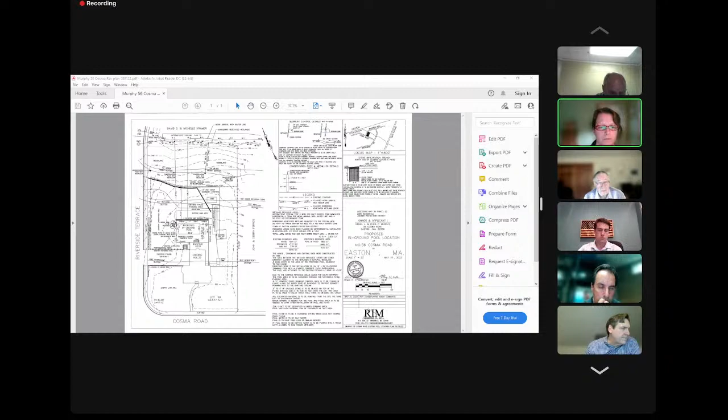Can you point that out on the plan for people? If you can, do you see the cursor? The western edge of the patio, right there, is where the existing lawn meets the existing mulched landscape area.

We went over it with the client last week. We ended up moving the pool further to the east to make it less out of the ground than it would have been if we had left it where it was before, and also to preserve the existing landscape area. Okay, thank you.

I think the other thing to note, from my standpoint, is that the applicant is proposing a filter cartridge system. Is that correct? Yes. So that's the one that's least impactful on the environment because there's no backwashing or anything, it's just changing of the filter. I just want to note that for the record.

So I don't have any further questions. Anybody on the commission have questions before I go to public comment? No, not for me. Okay, so no comments from the commission.

Any public comment? 56 Cosma Road. Just raise your hand or put something in the chat asking to be recognized. Okay, seeing none, Craig, I assume we want to close.

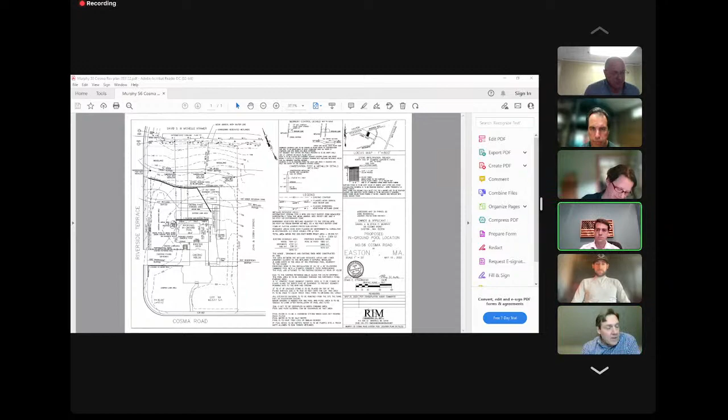Make a motion to issue a notice of permit for work and order of conditions for 56 Cosma Road. Carol, second. Just the permit for work. Let me remake the motion here. So, make a motion to issue a permit for work for 56 Cosma Road. Carol, second. Caulfield's, Carol second. Roll call vote: Caulfield's aye. Benson, aye. Carol, aye. Crossman, aye. Spady, aye.

Fair enough, Greg. All right, thank you very much. Thank you. See you in two weeks.

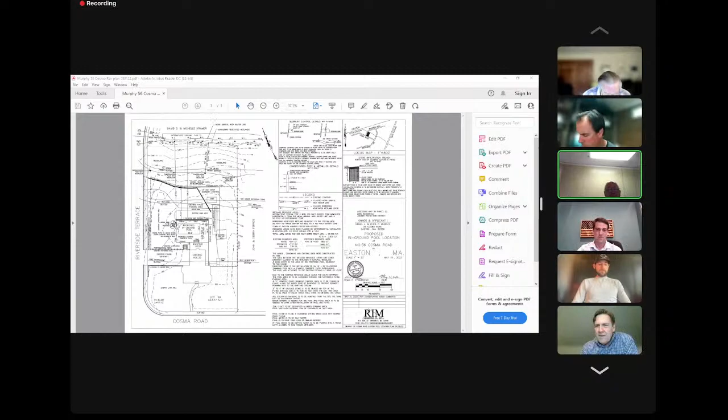Okay, so now up is 639 Turnpike Street, which is a notice of intent for an upgrade to a residential septic system. This is a Collins project, so we have Peter Lyons.

What's up, everybody? Hey, Peter. You cut out quick, but 639 is up first. You want me to pull that up? 639 Turnpike. Yep, that'd be great.

Just introduce yourself for the record. For the record, Peter Lyons with Collins Civil Engineering Group, representing our applicant and owner at 639 Turnpike Street for a notice of intent for the repair of a failed on-site septic system. It is an existing 3-bedroom home.

We have a BVW line across the backyard and an isolated wetland line flagged 1 through 5 in the southern corner of the front yard. The 50-foot buffers come up towards the house and right along the edge of the proposed septic system. In order to maintain the required distances off the house, we are as close as 61 feet to the closest corner of the leaching field.

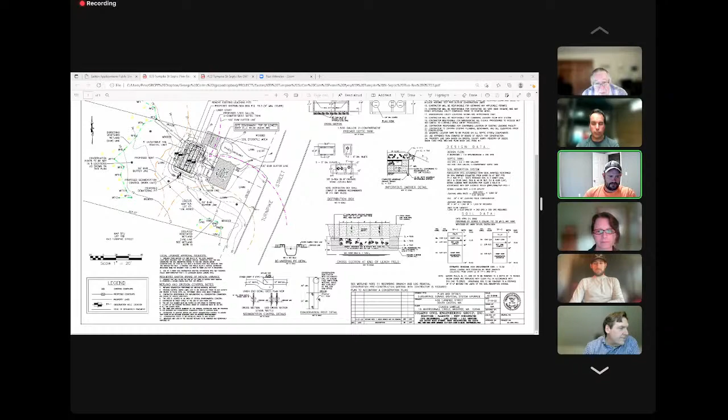Jennifer, Peter, just talk about Wetland Note 11, please. Regarding the isolated area of wetlands in the front yard, there are some branches and logs that have been disposed of in that area. Note 11 says branches and logs in isolated wetland are to be removed and properly disposed of. So that is our added note, and I believe the only comment from the staff report.

Right, and just that there's a potential vernal pool within, it's more than 200 feet away, and so it meets Title V and Wetland Protection Act. So those are all my comments. Thank you.

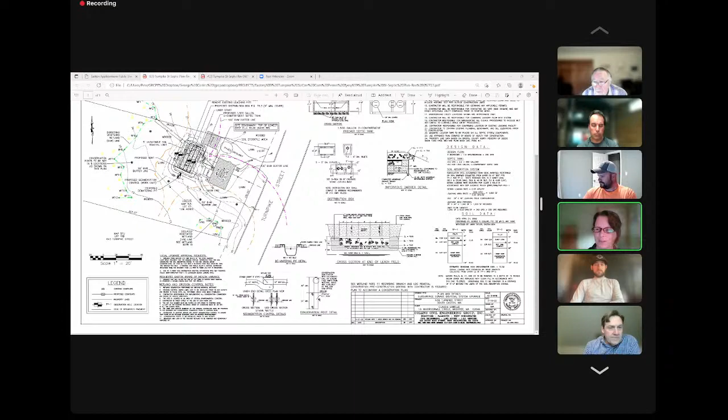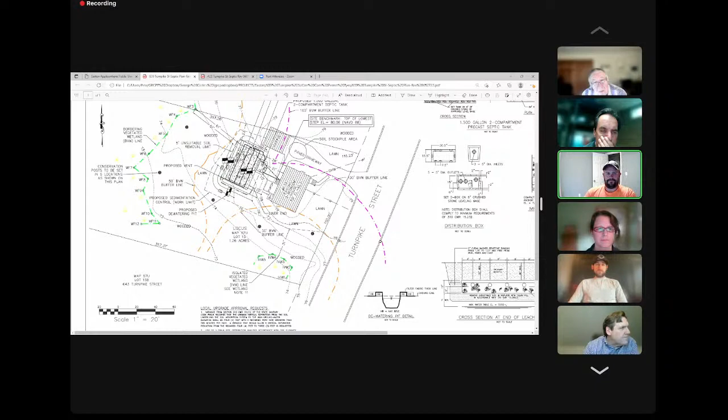So Peter, what's the elevation here of the field? Sure, I can zoom in a little bit. I think it's 78.3, which is... Yeah, so we have 79 as our high point, that's over the top of the tank. And then we slope down to an existing grade of 75 at the lowest corner. So it's about a 4-foot grade coming off of the leaching field, and then you add another foot over the tank. Okay.

Any comments from the commission? Seeing none, any public comment, 639 Turnpike Street.

Mr. Bremser, I need you to identify yourself, so I'm happy to recognize you, or if you want to tell me who you are so that I can recognize you for the record. I guess I am. I know, just for the record, I need to recognize you and know where you live. So if you can give me your address, that'd be great, and then I'll read the comment into the record.

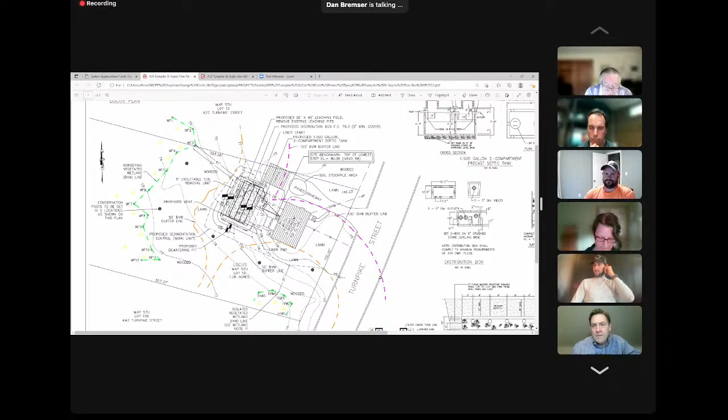Okay, any comments from the commission? Any further comment from the public? 639 Turnpike.

Peter, I assume we want to close. Yes, please. I'll make a motion to close 639 Turnpike Street.

Spady, second. Caulfield, Spady is second. Roll call vote. Caulfield's aye. Benson, aye. Carol, aye. Crossman, aye. Spady, aye. 5-0.

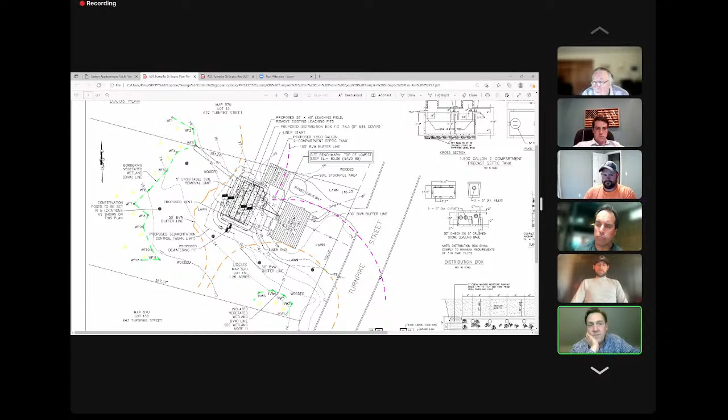Any discussion about what we want to do here on the order of conditions? We can condition delivering a set of plans that has a land surveyor's stamp on it. What's the, do we have, what is the rule? Do we, now that it's been requested, and it seems like something needs, do we have to go through with it, or we decide to just leave the engineer stamp on it? What are the protocols? I think Jennifer's telling us that from our perspective, that in order to be consistent here, that we should have a land surveyor stamp on this.

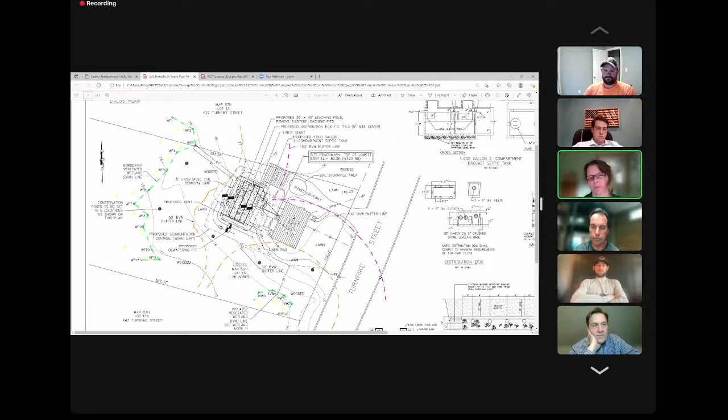It really shouldn't be an issue. They have somebody on staff who's probably done the survey work first. It's not difficult to have that person stamp the plan. Okay, can be conditioned.

Make a motion to issue a permit for work and order of conditions, noting that we need a new set of revised plans with the land surveyor stamp on it, including the land surveyor stamp in addition to the professional engineer.

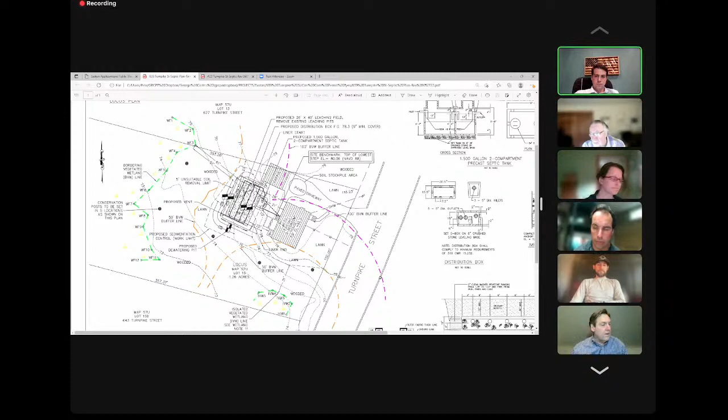Spady, second. Caulfield, Spady is second. Roll call vote. Caulfield's aye. Benson, aye. Carol, aye. Crossman, aye. Spady, aye. Okay, thank you.

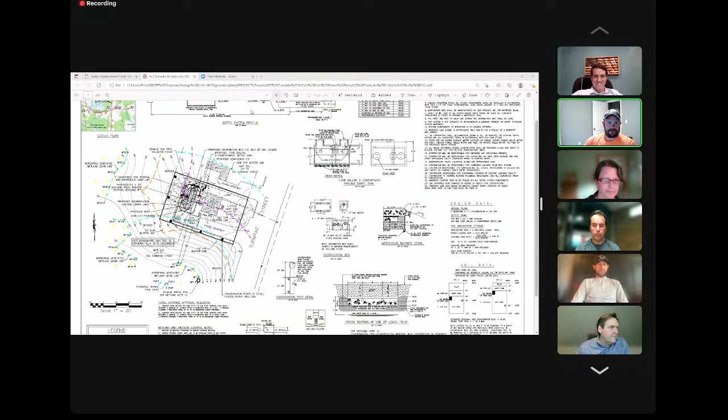Next up is 423 Turnpike Street. This is a notice of intent for an upgrade to a septic system. This one's me also. For the record, again, Peter Lyons with Collins Civil Engineering Group, representing the homeowner. Notice of intent for an existing failed 3-bedroom home on Turnpike Street.

We have multiple BVW lines shown on the plan that are off-site. The 50-foot buffer falls outside of the property line. The 100-foot buffer basically bisects our 9,000 square foot locus lot. We also have a potential vernal pool shown to the south off-site. This is the 100-foot to the potential vernal pool, and the 200-foot falling on the other side of the lot.

So our proposal is to replace the existing leaching components in the back of the house and provide a gravity system with a 1,500 gallon septic tank to a 14 by 32 pipe and stone field. There will be minimal grading changes associated with this project. There will be some trees removed approximately at the 100-foot buffer. You can see we've done everything we can to maximize our distance away from the resources while also maintaining the separation of 10 feet to the lot lines.

I'm sure it's going to be the same case as the other one, but we show 15 feet off the lot. Soil stockpile area is really the only place we could put it. We have utilities and overhead wires out front. So our stockpile area is at approximately the 100-foot buffer, or the 100-foot limit to the potential vernal pool.

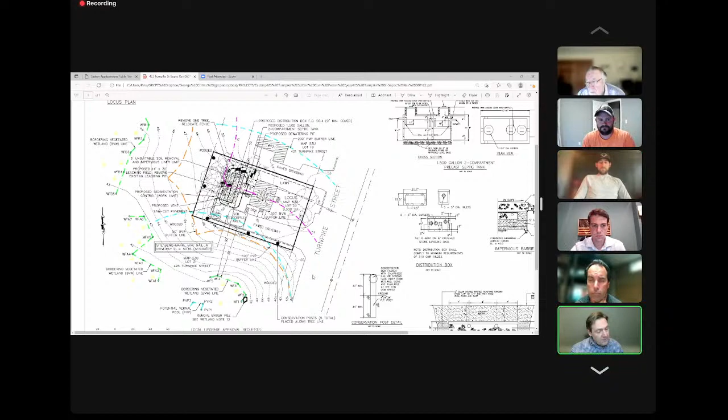Make a motion to issue a permit for work, order conditions noting that we need a revised plan with a professional land surveyor stamp included. Spady, second. Caulfield, Spady, second. Roll call vote: Caulfield's aye, Benson aye, Carroll aye, Crossman aye, Spady aye. 5-0.

Okay, I think that's it, Peter. All right, that's all I've got for you. We'll get those stamped and revised and sent back in. Thank you, appreciate it. Thanks, Peter.

So next up, remember we're taking 530, 550 Turnpike Street out of order. This is a notice of intent for development of a 101,000 square foot industrial warehouse, accessory offices, and all appurtenances, as well as demolition of existing site structures and infrastructure.

Sorry, I'm just taking care of some things.

Is PK Boston Law the representative here? I have John O'Leary, maybe he can tell me. Mr. O'Leary, are you the representative or the applicant, or can you tell me who the representative is?

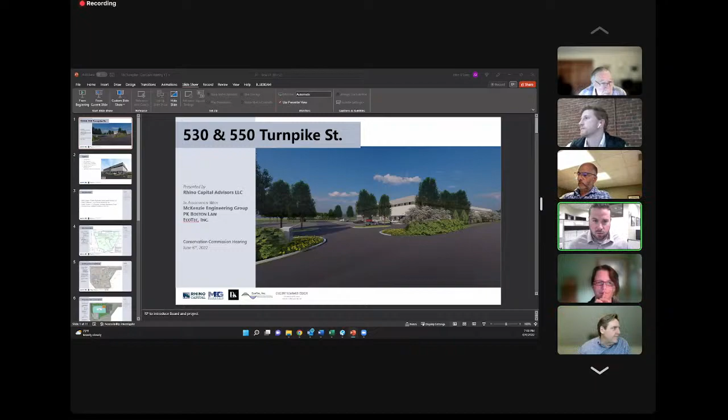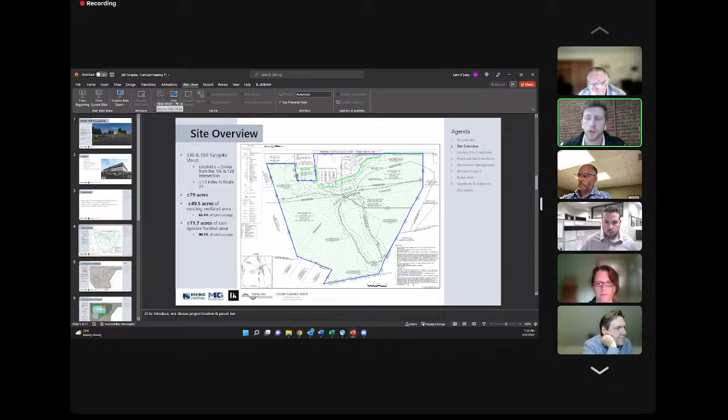It's going to be occurring on less than 10% of the total acreage of the property. We do have some proposed work within that priority habitat area, but it's for restoration and renaturalization, which we'll get into, and Scott will speak to as we go through this. So, existing conditions of the site.

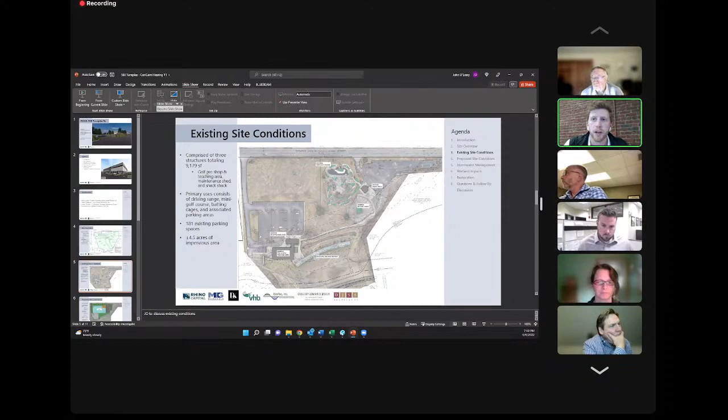The site is currently improved by a driving range, as well as a few structures - a pro shop, teaching facility, a maintenance shed, batting cages, a mini golf course, a snack shack, as well as the associated parking. Roughly 181 existing parking spaces and 4.5 or so acres of impervious area as it exists today.

I'll turn it over to Austin to discuss our proposed conditions. Thanks, John. For the record, Austin Chartier with McKenzie Engineering Group. We prepared this land survey and civil engineering services. We filed the notice of intent with the commission May 18th, as Attorney Pellegrini mentioned. And as the chairman alluded to, there was an ORAD issued on this property, issued May 6, 2020, so it's still got another year on it in terms of validity.

Just a few things to note on that ORAD: it was flagged by Brad Holmes of Environmental Consulting and Restoration. The majority of the resource flagged was bordering vegetated wetland, which encompasses basically both the east and west side of the site, along the driving range and along the rear of the parking lot to the north. John mentioned it is within the natural heritage endangered species area. As part of our filing, we did file with MESA - we submitted the NOI to them, so it's being reviewed on their end. There were some potential vernal pools flagged in the rear of the site. Thankfully, it's away from our limit of work, so we don't get too much into that in terms of the proposed site.

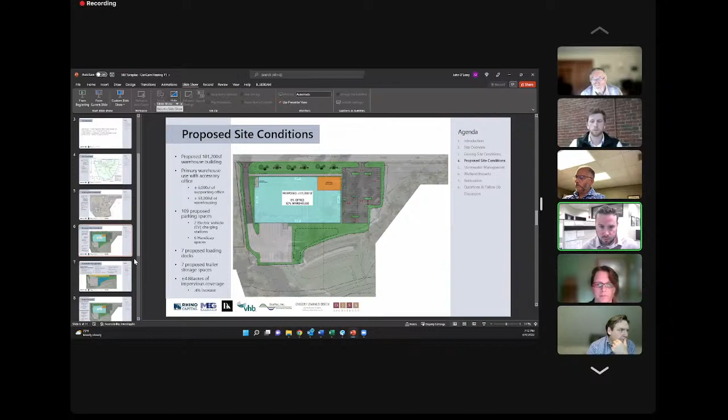The existing site, as he mentioned, the actual disturbed footprint of the site today is about 18.5 acres. Our proposed footprint is going to be about 6.8 acres. We are proposing a slight increase in impervious, which stems from the building. It's a decrease in parking lot coverage, but the building itself is really where the increase is. But we're really tightening up the footprint of the disturbed area, and Scott Morrison will get into the restoration plan a little bit more. Next slide.

So the stormwater management, I just wanted to quickly touch on this. The grayed out area on the bottom right here, where you can see the buffer zone around that, that's the existing stormwater basin. Essentially what happens on site today is there's a series of catch basins that flow directly into this stormwater basin. And it's a dry basin. There is an outlet on the bottom.

For our design, this is now, because it was built prior to 1996, it is a bordering vegetated wetland because it's connected out to the other flags. So it kind of helped us in our design where we're able to look at that as the focal design point, kind of. So it's a fully compliant stormwater system.

Both the Easton requirements state that you've got to comply with stormwater management regulations, so we fully comply with those. There's no new untreated discharges. We're actually making use of the existing inlet pipes into that basin, as we're going to use those as the outlets of our basin.

The peak rate attenuation, we are reducing it in all storms up to and including the 100-year storm event. And that was not basically the determining design factor. The design factor was water quality volume, so that was really the restricting factor. So we decreased it, I think, some 40%, even in the 100-year storm.

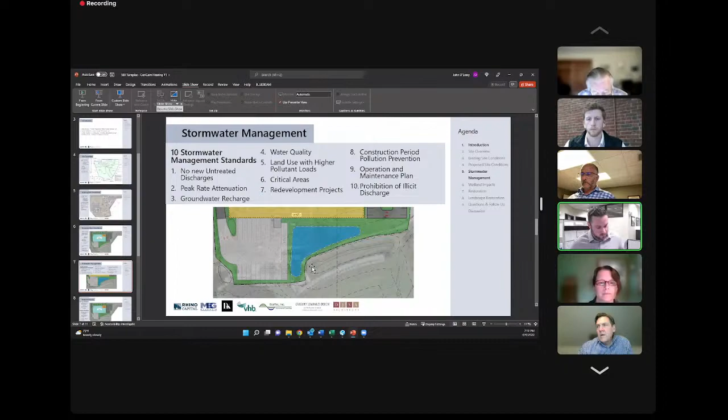John, I think you and Scott might speak to this a little, or? Yeah, absolutely. Awesome. Thank you for that. Scott, I don't know if you want to jump in here.

A big part of this project, and one of the reasons we thought this was a really great opportunity, was the existing impact to the wetland areas and buffer zones compared to our proposed impact, as well as the restoration we're proposing in the driving range area. I'll let Scott get into the details because he can speak to it far better than I can.

Thanks, John. Just for the record, Scott Morrison from Ecotech. So the existing conditions: impervious between the 50 and 100 foot buffer zone is about 24,765 square feet. Under proposed conditions, that will be reduced to 13,595 square feet. Currently, in the existing condition, there's 18,785 square feet of impervious between 0 and 50 feet, and under proposed conditions that's 0. So within the 100 foot buffer zone, there's a reduction of about 30,000 square feet of impervious surface within the buffer zones. It's a significant reduction.

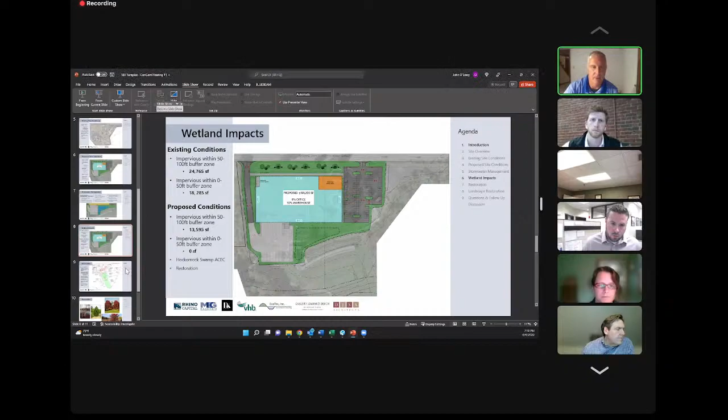If we can go to the next slide, we can talk about the mitigation areas. If you look at this slide, you can see the areas in orange and red where you've got impacts within the 100 foot buffer zone. The area to the south, highlighted in green, is about 8 acres proposed for renaturalization. We met with Natural Heritage early on to discuss the project and incorporate any concerns or suggestions they had.

What we came up with: about 8 acres of mowed and maintained turf, which is part of the driving range, will be restored by planting native saplings throughout the area. We've proposed 100 of those scattered throughout. The other important part, probably the most important, is there's large fencing along the northern and southern sides of the driving range.

It goes from the ground and is probably 30 or 40 feet high in places. As part of the project, that will be removed, which will eliminate those wildlife barriers and connect the larger wetlands to the east and west. We're also proposing, at Natural Heritage's request, a 3-year invasive species mitigation treatment.

We treat in the late spring and again in the fall to make sure that as we're replanting and colonizing this area to restore it, any invasive species are treated to try to prevent them from colonizing the area.

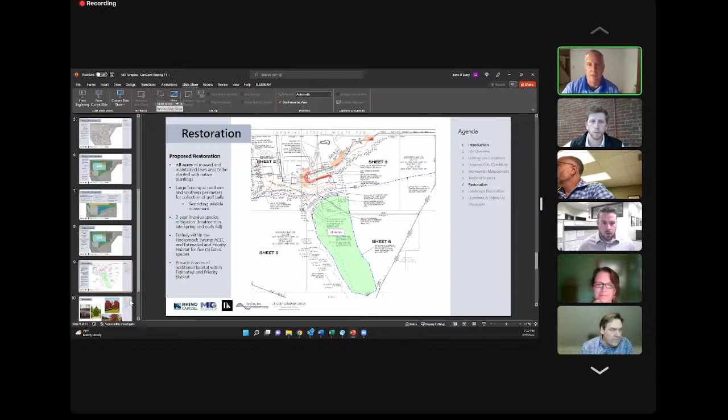I think it's a really good project, and I'd be happy to answer questions. Going through the next slide of what we'd expect things to look like, we've provided some photographs of the plantings we're proposing, which will include gray birch, white pine, red maple, and red oak—all species that currently grow in the area, all native species. We think it's going to be a real improvement.

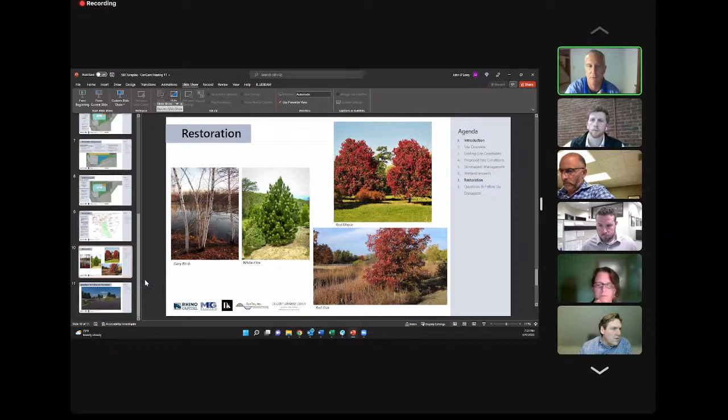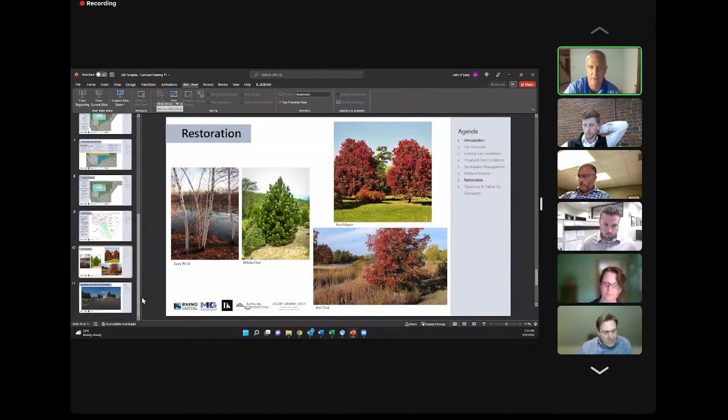This is a photo of what we'd expect the area to look like in the years after it's replanted. Again, we're excited about this project, and I think it's a win-win. There are significant wildlife and habitat benefits to this project.

At this point, we can ask if the commission has any follow-up discussions or questions for any of the project team. I know there's some review still ongoing, but we'd be happy to answer questions, and if we can't answer tonight, we'd be glad to come back with additional responses.

Could you give us an indication of what size the plantings will be? Yeah, we specified 6 to 8 foot height saplings, I believe. There were some comments from Ms. Carlino in her review letter, and we're looking into potentially adding some shrubs into that as well.

So, Jennifer, before we go to commission members' questions, do you have any comments for us?

They have a long list of comments on the plans and other documents they provided, but I think most of them are easily addressed. The stormwater review, we requested the quote at least a week ago and followed up again today looking for that quote. Those were really the main issues, and I didn't realize there were 5 species there.

So if the shrubs don't make sense with Natural Heritage, then obviously don't propose them. Okay.

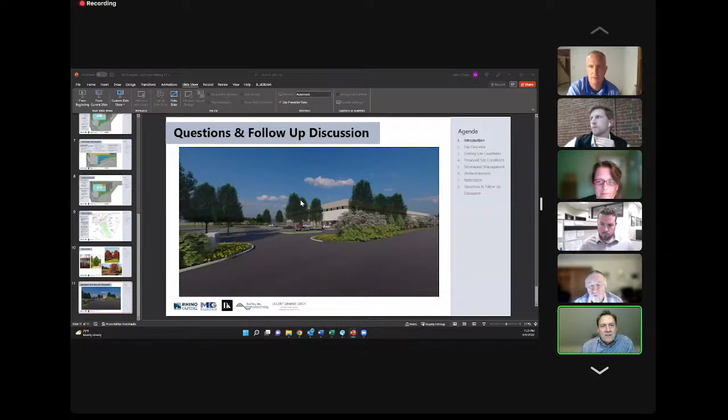Just one question: can we display a plan, or I could look it up and display the plan of the proposed building and parking lots compared to the wetland boundaries and the buffer zone boundaries? Because that's the one plan I didn't see here. I know it wasn't in the presentation, but if it's in your document somewhere, if we could just look.

I should be able to pull it up. You guys are proposing a substantial improvement over existing conditions, and I want that to be visible on a plan. You know what I mean? It's slightly unusual for us to actually get a plan that is an improvement, at least in the buffer zones. So I want to see it.

Hold on, sometimes when you get a unicorn in front of you, you got to take a look. Austin, I don't know if you have one that's readily available. I have one up here in front of me that might work.

Yeah, there's a lot going on the plan, so I think just the site plan should be fine. Yeah, I have the utility plan, if you want to drive the bus, go for it, if you have one readily available. I had the utility plan pulled up. I thought that was at least busy, I should say. Yeah, I know it gets tough with these big projects to find one plan that shows what we want to see.

I mean, certainly while Austin's looking for that, the fact that we're moving the disturbance all the way up to the road side of things is far away from the wetland areas and off to the stuff on the north side of the property. That's all bordering vegetated wetland, it doesn't even describe what that could possibly be. I mean, that is a swamp with a river going through it and everything else.

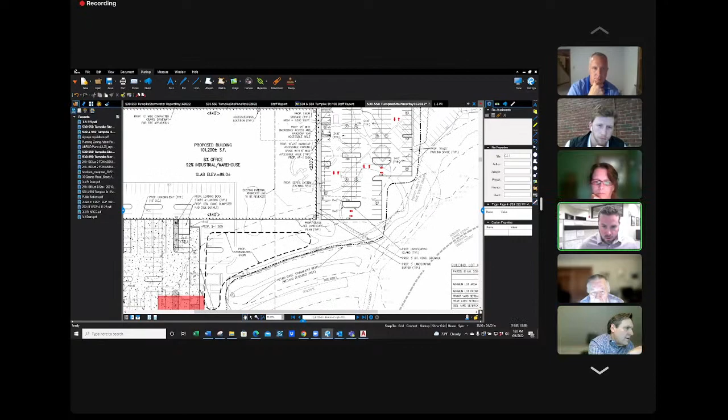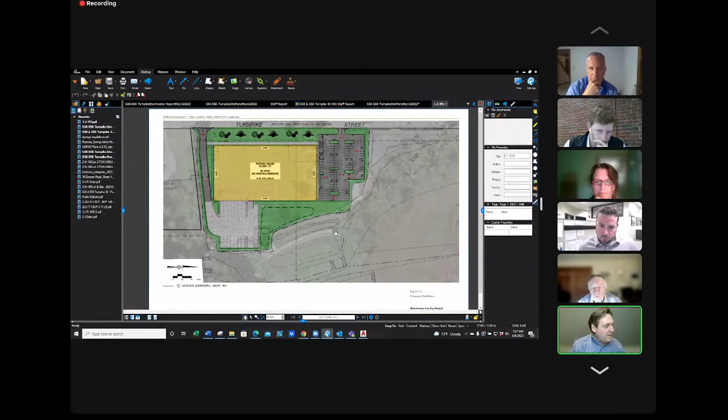And that is really this basin that's putting that - yeah, I mean Jennifer and I had a conversation last week. Basically this stormwater feature turned into a bordering vegetated wetland. So that's right, we noted that when we did the ORAD. So, it happens, it's what we have to deal with.

Anybody else have any questions from the commission before we go to the public?

I'm just happy to finally see the... oh sorry, yeah you can go. No, I was just curious if there were any other considerations that had to be made because it's in the Hockomock Swamp area, but it sounds like it was covered. I was just curious if anything else had to be considered because it's such a protected site.

So you guys are waiting to hear back from Natural Heritage on this, right? Correct. So do we have a time frame on that?

There's a 30-day review procedure, so we'd expect to hear back from them in 30 days. So my guess would be next week or two, we'd definitely hear back from them.

So Natural Heritage will give us some insight into whether or not the proposed activity is impactful on those species in the ACEC and in the rare species habitat, obviously. So that'll be a big impact. I mean, certainly what they're proposing, to convert eight acres to naturalized area again, is a benefit. Just has to be done right and whatnot.

One thing to keep in mind is that the mitigation is driven from having a pre-filing consultation with Natural Heritage. So what we're proposing is what we discussed, so we don't anticipate any major changes.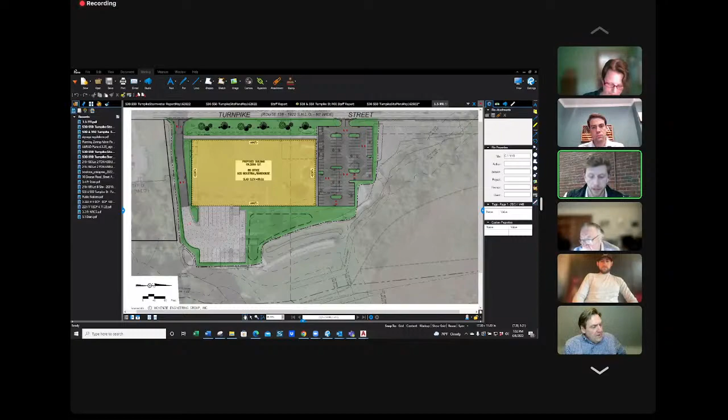Yeah, I mean, I think the only thing that's going to make or break that for you guys out of your control is Natural Heritage. Exactly. So again, if we can get all of the comments to you guys and have a discussion again on the 27th, and then the only outstanding item is hearing back from Natural Heritage, I still think that's an evening well spent for us. So okay.

So before we go on here, I just want to make sure we have any public comment for 530, 550 Turnpike Street. Any public comment? Raise your hand or tell me in the chat box if you want to be recognized.

A lot of people in the audience tonight.

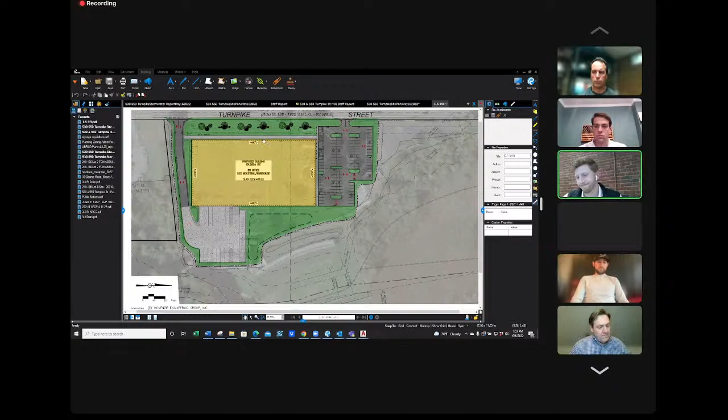Next up is 534 Washington Street. This is a notice of intent for building additions, loading docks, increased pavement and parking, and modification of a bioretention basin at 534 Washington Street.

And let's see who the representative is. Brad or somebody else? I don't know who's representing Holmgren. Rogers. They may be before the planning board tonight, so they may not be finished yet. No, he's here, he was just all the way down the bottom. Okay, I thought I was scrolling to the bottom. My trusty sidekick Tish pointed that out to me. Thank you, Tish.

So Scott, you are up, and I assume you can hear me? We can hear you, we cannot see you. So if you could turn on your video, that would help us a lot. There we go. There you go.

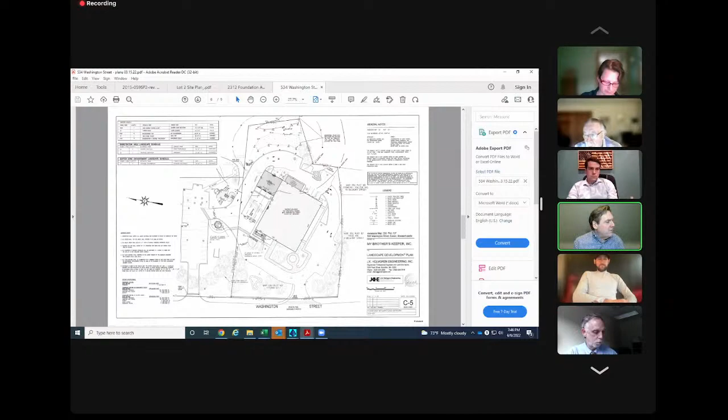Roll call vote. Caulfield's aye. Benson, aye. Carol, aye. Crossman, aye. Spady, aye. Thank you, 5-0. Okay, so we'll see you guys in a few weeks, hopefully.

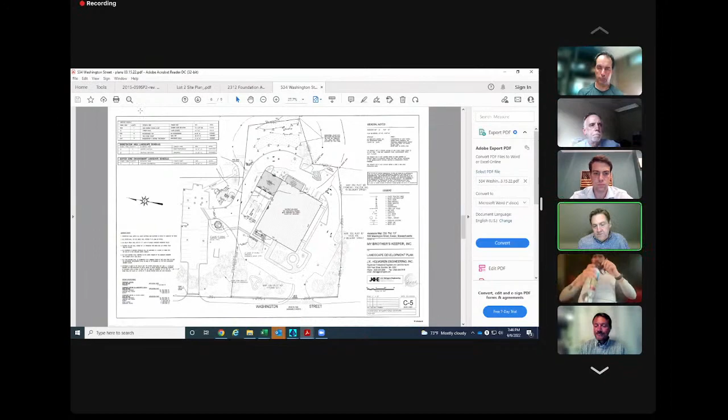Next up is 170 Chestnut Street, which we had continued a couple months ago. We did hear from the applicant today, and I believe we're going to push it off to July 11th. Correct. They did put the topo on the plan as we requested, and they're waiting for the report from the wetland consultant, so they did ask for a continuance to July 11th.

Okay, so make a motion to continue 170 Chestnut to July 11th. Second, Caulfield's Benson was second. Roll call vote. Caulfield's aye. Benson, aye. Carol, aye. Crossman, aye. Spady, aye. 5-0.

Next up is 91 Union Street, and again we have a continuance here. Jennifer, do we have a time frame on that at this point? July 11th. 91 Union Street, make a motion to continue to July 11th.

Spady, second. Caulfield, Spady, a second. Roll call vote. Caulfield's aye. Benson, aye. Carol, aye. Crossman, aye. Spady, aye.

Okay, so everybody take a deep breath now. This next up is 560 Foundry Street. This is a continuation of a notice of intent for roadways, stream crossing pathways, stormwater control, landscaping, grading, utility work, and mitigation areas to support 46 single-family home lots.

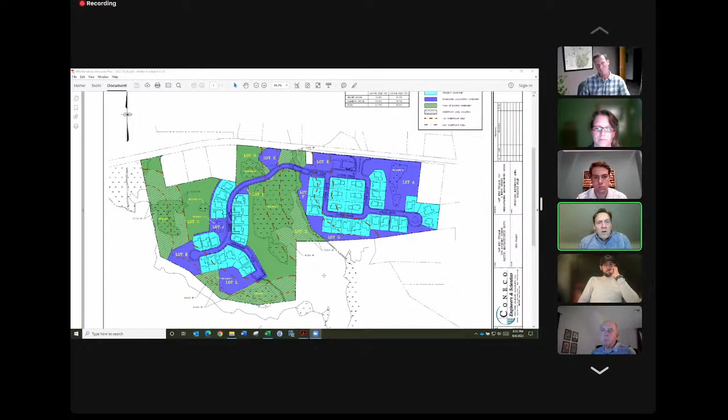One of the things that Mark touched on, and Michael too, is things being done to give a positive impact in other areas where there may be impact in the vernal pools. We've had this conversation multiple times, that there was no way to avoid any impact entirely. It was whether the overall impact was something we felt was not significant. I think that's where we came down on this, and one of the factors was stream daylighting.

Whether that would have a positive wildlife habitat impact in general, not necessarily to the vernal pool species specifically. Daylighting a stream and adding bank where it's currently just a straight shot through a culvert has got to be much better than the culvert. Is there a way to discuss qualitatively, rather than quantitatively, what that impact might have on habitat? Mark, do you want to take a stab at that?

I think there probably is a way to do it. Broadly speaking, it's certainly going to be a significant improvement. Anytime you remove a long piped stream and restore it to a more natural water course, and put in all the native plantings, it's obviously going to be an improvement.

Trying to really quantify that would require a wildlife habitat evaluation specific to that river, understanding what species currently utilize that stretch and how the culvert might currently function as an obstacle to wildlife movement. But if I understand the question correctly, I don't think that's necessary here. This is clearly an improvement that will positively affect wildlife habitat, maybe not specific to the vernal pools, but it may also provide some terrestrial habitat in the buffer portion for the vernal pool species.

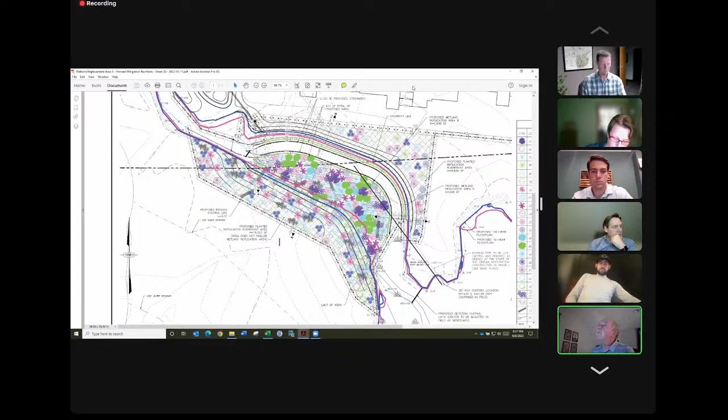This colorful plan shows the stream daylighting and the proposed grading and restoration in this area. The vernal pool Mark was talking about is just over here, in Wetland A, just off to the east. One other thing I want to mention is we do have some vernal pool upland habitat mitigation already in our proposal - we're proposing to move some stone walls, which provide pretty good cover habitat, and we've got some cleanup in areas that are in the vernal pool buffer zone. So our proposal does have some mitigation in upland areas to provide additional vernal pool buffer protection.

I want to give the other commissioner members an opportunity to ask questions. Anyone have any questions about vernal pools or wildlife habitat that we haven't covered here? Mike?

I know we were out there with Mark, and Rory and Jen as well. This is stuff I've kind of felt going along, looking at this project the whole time - there's a ton of habitat here. I don't really have any questions. It's going along with what we kind of know; we felt we were going to find a lot of habitat there, and we're now finding it. Great.

So from your perspective, is there sufficient mitigation happening to not significantly adverse impact here, or?

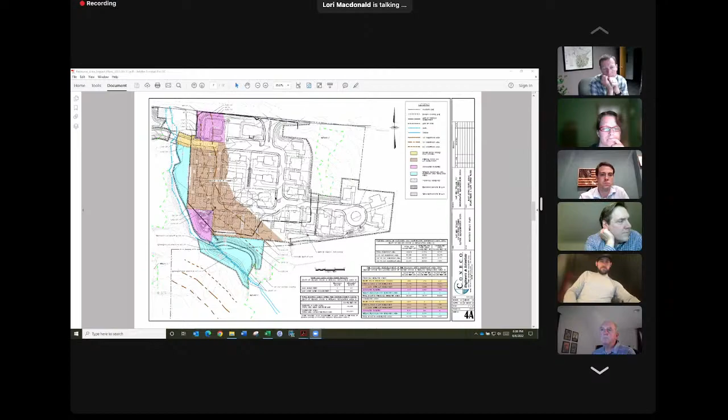So we do meet the stream crossing standards for that particular crossing that Mike was just pointing to. We're also providing for wildlife movement along Mulberry Brook by only constructing stormwater basins close to the riverfront area. There'll be vegetation areas where wildlife can move along Mulberry Brook along the back of the site. Originally there were homes proposed at those two basins, and we reconfigured the project so that it's more of a natural vegetated area.

There's another isolated wetland down here that we avoided through the reconfiguration of the development over time. And this purple area here, part of this is the detention basin, part of this is turtle nesting habitat. Same thing in here, we have turtle nesting habitat on several of these basins.

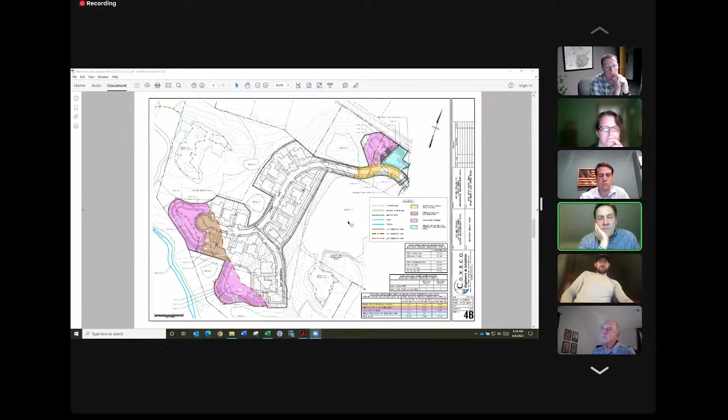Okay. Any other questions from the commission before I go to public comment? Or offer Mike the opportunity to present anything else he wants to present tonight? No, I think I'll do a quick PowerPoint slideshow next time, giving everybody an overview from the beginning. We've talked about some of the specifics that'll be in there, we can talk about them again. And we've got, Jennifer, we've got questions about numbers that we're still working through.

Part of that is because there are so many versions of the plans. Actually, I saw a snippet of the plan that you took some numbers from, and unfortunately, that's an older version. So Lori and I actually spent our Friday night together scrubbing through the numbers, making sure we had all the numbers right. So I've been presenting tables.

We have a series of revised tables that I'm going to send over to you, and I'll upload them for the commission. They break things out into riverfront and floodplain, showing impacts and mitigation, including the floodplain foot-by-foot analysis you asked for, which we had on the plans volumetrically, but now we have the areas as well.

Thank you, that really helps in filling out the order of conditions form. Just compiling everything - between Lori, Megan and I, we've gone through the numbers and we're pretty comfortable that we've got the right ones. All right, good, thank you.

So the septic's in the front yard. The wetlands surround the property here in the rear. In this area, there's a gate that goes out the back, and of course that means people want to use it to dump their lawn clippings. There was a pile of lawn clippings, the straw wattle, a wheelbarrow, and something else in the wetlands. Some of it's been removed. I was there yesterday - not all of it has been removed.

I can probably share a picture. We can decide what to do. Oh my, I have too many emails.

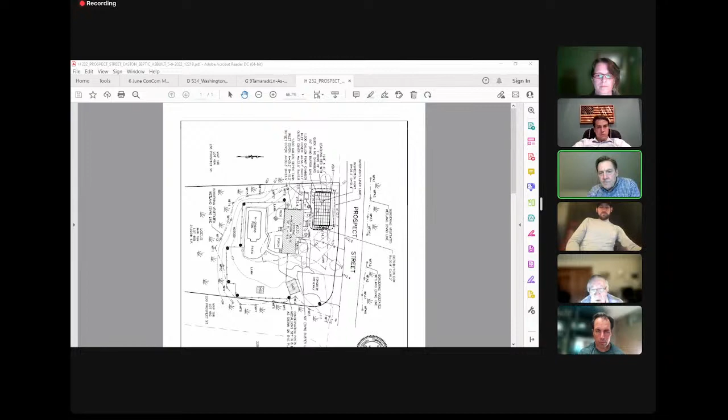So that's in front of us here. We can issue a partial, or we can deny. Those are our choices. Comments from anybody?

Make them move it - you already asked them to. How come all they did was remove one part of it? Not even a part of it. Just tell them to move it. So would that be a denial? Yeah, that's a denial. Can we continue it with a request to move it?

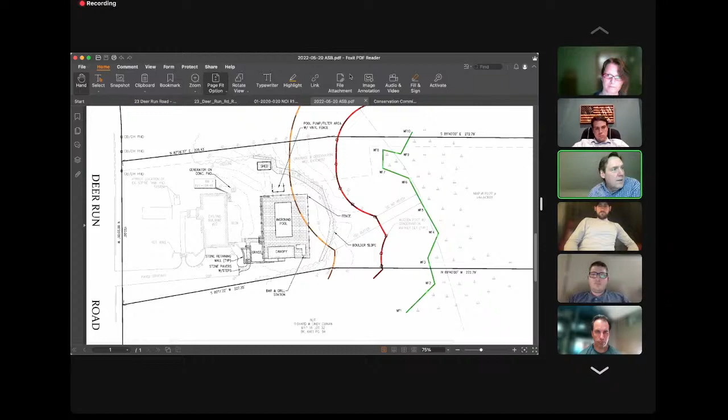Seeing none, I make a motion to issue a certificate of compliance for 23 Deer Run Road. So moved, seconded by Spady. Roll call vote: Callfell, aye. Benson, aye. Carroll, aye. Crossman, aye. Beatty, aye. Thank you.

So next up is enforcement for 91 Summer Street.

So I know we have Eric here. Hey guys, hello, how are you? Brad Holmes should be on, and I think John Canavo might be in the audience. They should both be coming over. Excellent.

Evening, members of the commission. Brad Holmes here. Hello, hello. Do you guys want to give us an update?

Sure. Since the last time we were before you, we had just barely presented a restoration plan that Brad's office put together, and I don't think Jennifer had an opportunity to review it before that meeting. In the couple of days following, Jennifer did review it, made some comments, and we revised the plan accordingly. Jennifer issued the enforcement order, and we went out there and got to work.